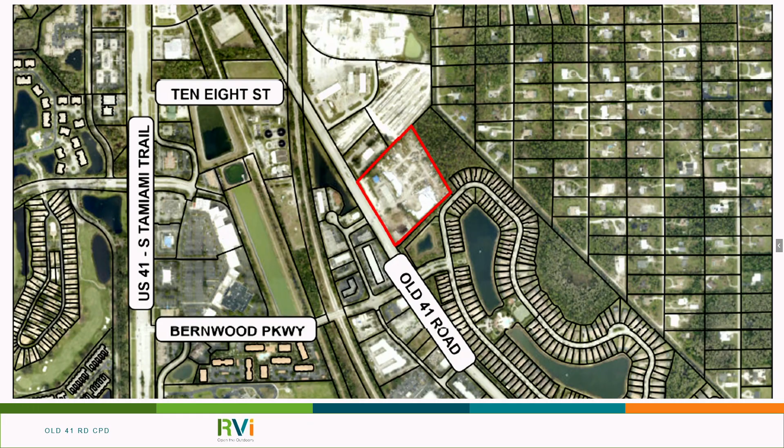With that overview, I'll turn this over to Mr. McBroom to walk you through his firm.

Hi, good morning. Connor McBroom with Forager Real Estate, Inc., as manager and sponsor of the applicant. We're an integrated commercial real estate development firm with offices here in Naples and also Toronto, Canada, where we are originally based. We've been invested in the Southwest Florida region for over 3 years now, and the proposed project would take our footprint in the vicinity to over 250,000 square feet.

We've owned the property for over a year now, and wanted to emphasize that we're fully invested in the market, committed, and fully intend on bringing this project through to fruition. We've assembled an expert team that you'll hear from today, by and large a local team. We've collaborated well with members of city planning and are excited for the opportunity to present this.

We feel that we've been extremely thoughtful about the way that we've programmed this site, responding to significant supply-demand imbalances that we see in the market, particularly for smaller format commercial space. We've also introduced a private mini warehouse component that responds to the need for secure, storm-rated vehicle and other valuable storage, but highly compatible, and will accommodate a lot of small businesses and medium-sized enterprises as well, where we see a dearth of good quality accommodation in the market.

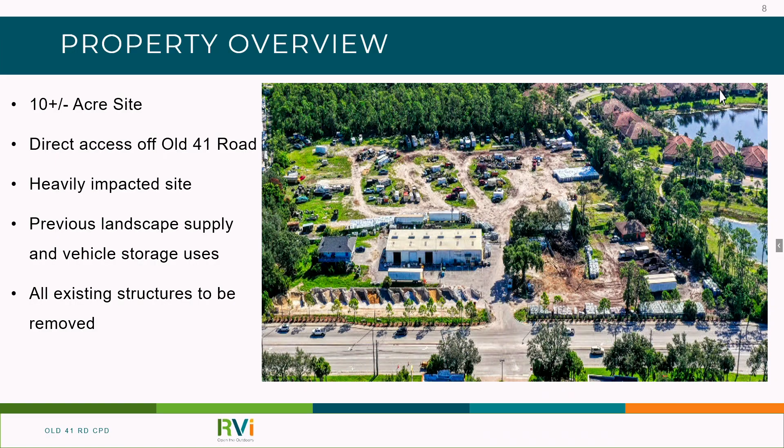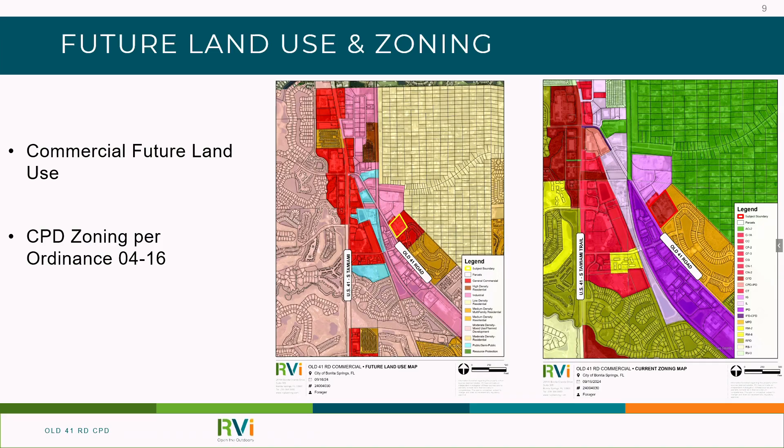Looking at the zoning and future land use designation for this site, it is commercial and will be remaining commercial. The existing zoning is a commercial plan development that we are changing the uses for, as Francesca spoke to earlier. Going over this site with its neighboring properties, directly to the north we have the Moose Lodge, and further north from that we have some heavy industrial uses, which is a concrete supply company. They do manufacturing of seawalls on site.

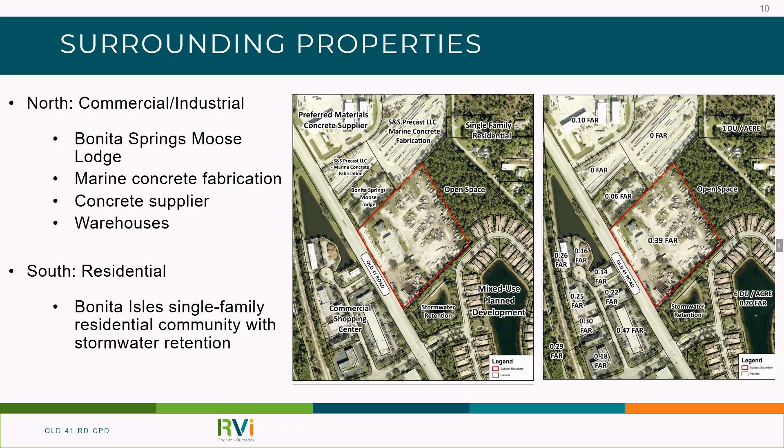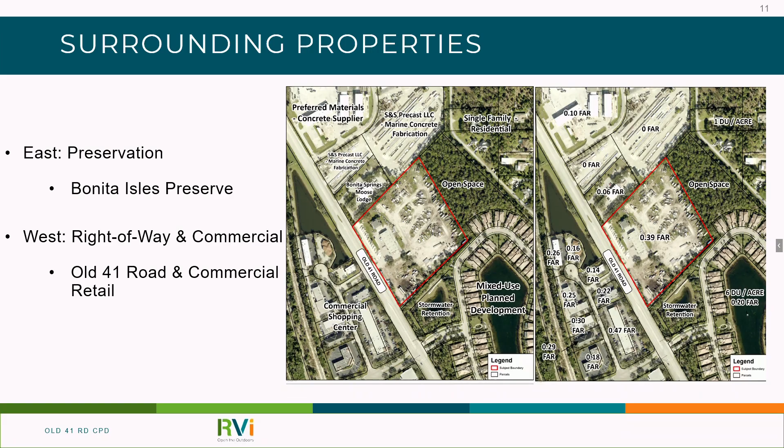Directly to the south, we have the Bonita Isles community as a whole, but directly abutting our property is their stormwater retention. To the east, we have the Bonita Isles Community Preserve land, and to the west we have the Old 41 right-of-way, and then commercial retail on the opposing side of Old 41.

We are proposing 6 separate buildings: 39,500 square feet of commercial retail, which will front directly on Old 41, with 4 buildings behind it that will total 150,000 square feet of flexible commercial uses, light industrial, and storage and mini warehouse in the back.

All of our buildings on site will be no more than 30 feet in height, and we are including an enhanced buffer along the south property line directly abutting the Bonita Isles residential community, which will be 25 feet in width, and we did include a 6-foot wall or fence at the request of Bonita Isles.

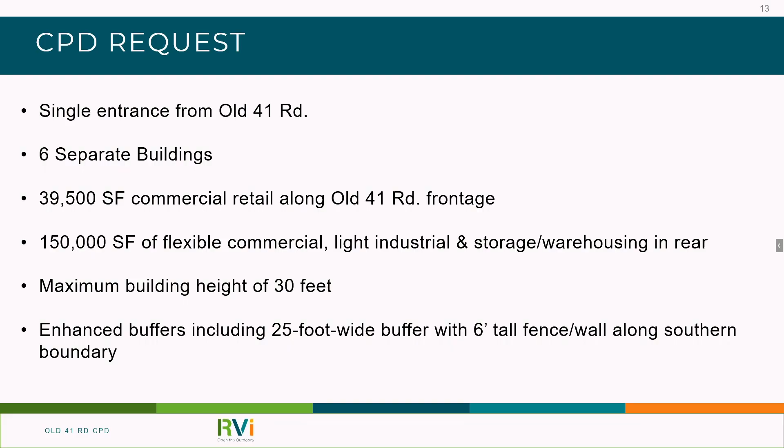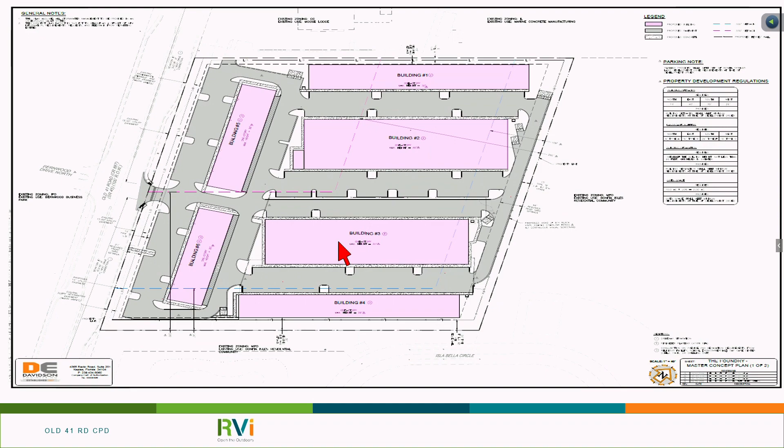Speaking to deviations, this request has 3 deviation requests. The first is access off of Old 41. As I mentioned, we will be maintaining that existing access. The code requires a separation of 660 feet from any neighboring entrance. The site currently does not have that, and since we are maintaining it, this deviation is required. The separation to the north is 459 feet, and from the south, the Bonita Isles entrance, it's 587 feet.

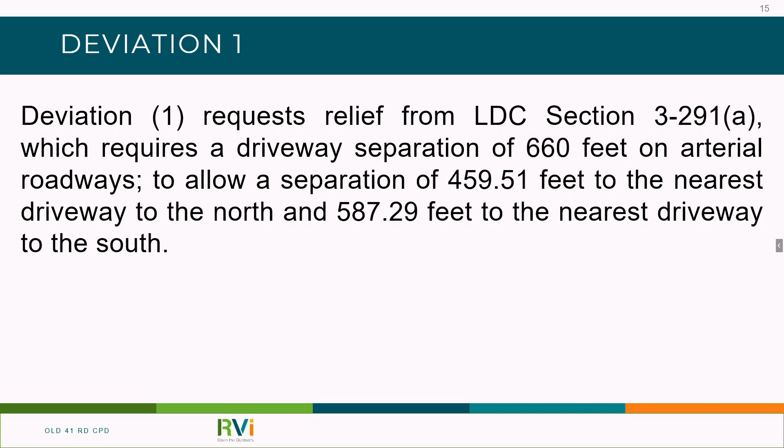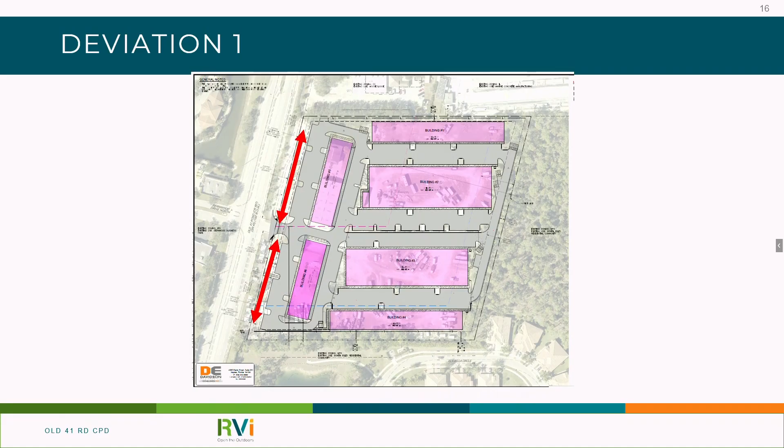As you'll see on your screen, here are the arrows showing those separations. The access to the north is for the Moose Lodge, and the access to the south is for the Bonita Isles community.

Deviation number 2 is a request to remove the requirement for perimeter plantings on all sides of the buildings. As you saw from our master concept plan, we are proposing to include landscaping on the end caps of each building because these buildings will be situated as storage facilities with garage doors that open up. We need that vehicle access, so landscaping could not be provided directly on all four sides of the building. We compiled that square footage and are putting it on the end caps to make nice landmarks for each of the building uses.

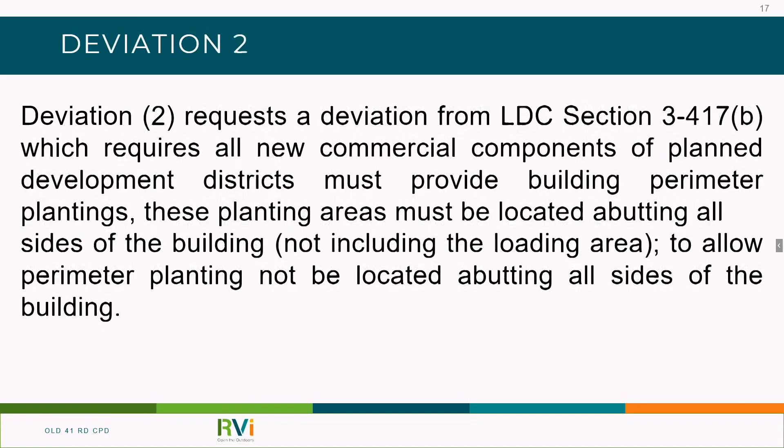Deviation number 3 is a request to remove the distance requirement for consumption on premises and off premises for the closest dwelling units. We do not have any schools, religious facilities, or daycares, but we did pull that from the code to be clear. Because of the separation with Bonita Isles, we abut their stormwater management and preserve, but there is one residence within that distance requirement, so we want to be sensitive to that with the request. These consumption on premises uses will only be in the first 2 buildings, those commercial buildings that front Old 41. I'm going to pass it over to Robert Derricks to go over our architecture.

Hi, my name is Robert Derricks. I'm an architect with JMDG. We're a Naples firm, but over the years we've done some work in Bonita. I was responsible for the Bonita Springs poker room as well as the sports complex next door. We're now involved in this. I want to speak to the architecture a little bit.

If I can back up the planning slide - there we go, that's fine. What we've done here is position the retail at the street side of Old 41. That provides us a kind of screening for more of the industrial applications behind it with the warehouses and the car storage. As you can see, that provides good screening with a central access point to the back area, which can be secured.

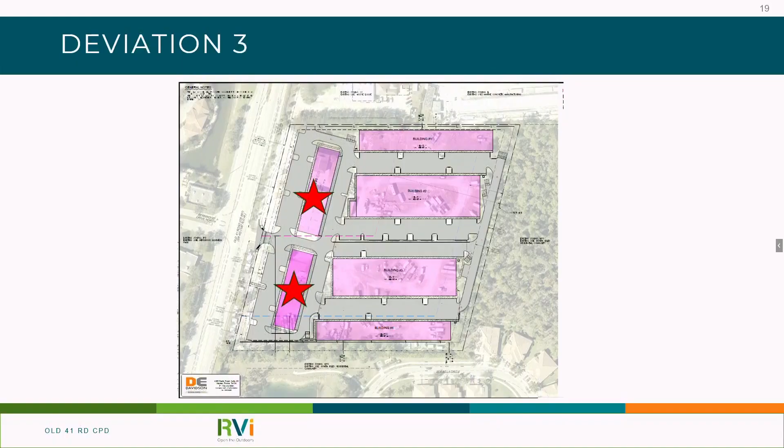And that pretty much speaks to the overall massing on what we did on the site plan. As far as the exterior elevations, it's a combination of canopy overhangs to provide rain coverage, as well as inset, and we alternate from unit to unit.

There's basically three elevational unit types that come across the commercial. Building 5 and Building 6 are almost mirror images of each other, except Building 5 is larger and has a little different center element to it.

And that applies to Building 2. It's the same elevation.

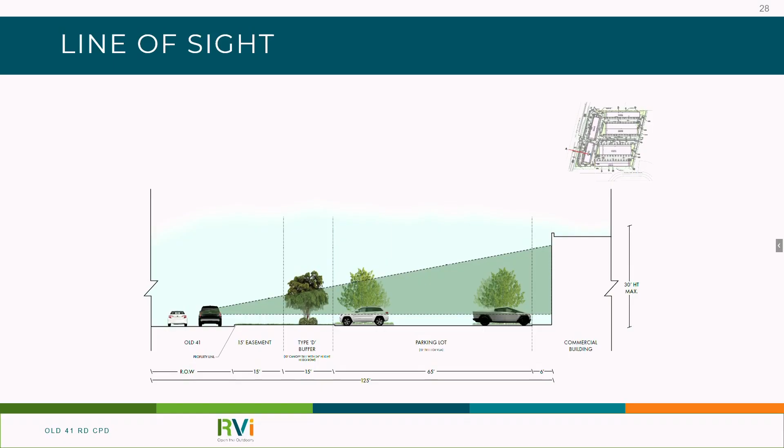And I'll pass it on to Christian.

I have a question, please. Question for the board, sorry. You've identified on the plan a forestry reserve. There's a forestry reserve sign along Old 41. What is that? Forestry Reserve is the existing landscape company that's on site right now. They are a landscape supply company. That sign will be removed, that's the name of their previous business. Okay, all right, thank you.

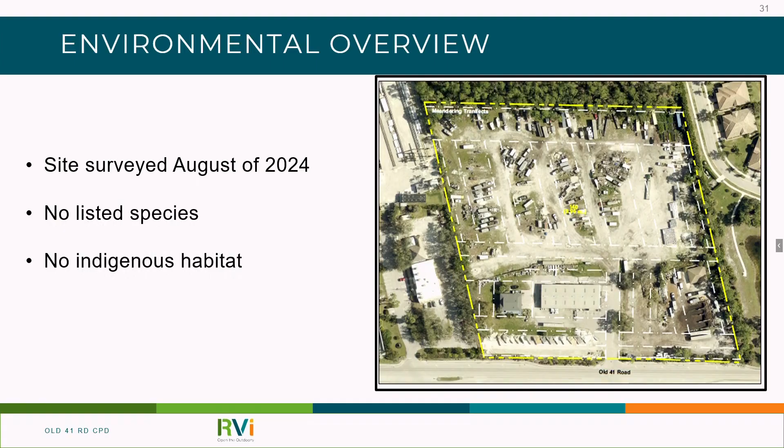The property was surveyed on August 13th, 2024 for the presence of listed species. During the survey, no listed species were observed on site. In addition, the survey did not find any indigenous habitat for listed species to use on site.

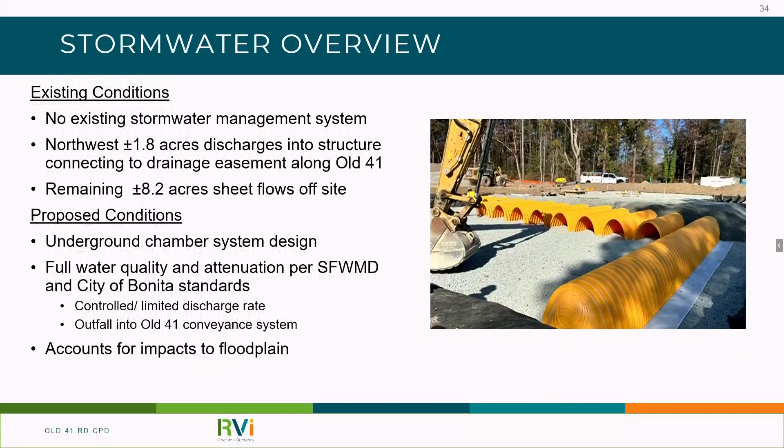Why aren't we doing this? Never mind, seems like a great idea. Money, that's why. Yeah, there's that. Thank you. Any other questions? Thank you.

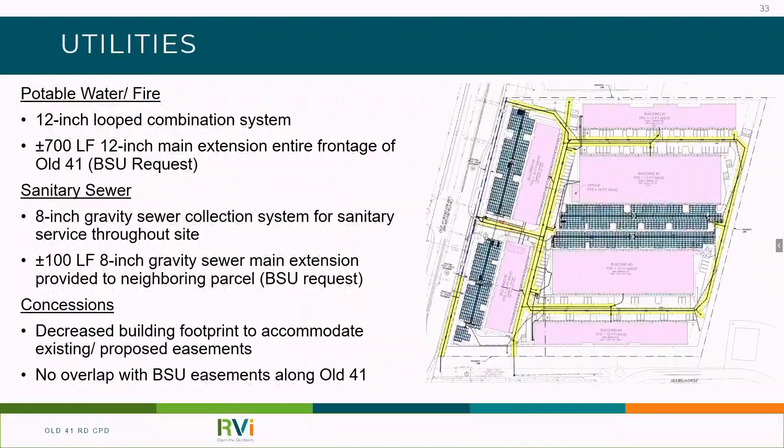Next, we're going to talk about transportation with our transportation engineer, Yuri.

Morning, for the record, Yuri Baiko with TR Transportation Consultants. I'm a licensed professional engineer in the state of Florida, and I've been sworn in and accepted as an expert in transportation planning before. We did prepare a traffic study for this rezoning application, which is requesting approval for up to 39,500 square feet of commercial retail uses, 80,000 square feet of storage mini warehouse uses, and 70,000 square feet of industrial uses.

We also prepared a trip generation comparison between our proposed rezoning request and what was previously approved as part of the previous CPD, which was approved for up to 126,600 square feet of commercial retail uses. So when you compare the two scenarios, our proposed rezoning request results in a significant reduction of traffic, specifically a 78% reduction in PM peak hour trips. We wanted to emphasize this because it's a significant reduction in traffic from what was previously approved as part of ordinance number 0416.

We also prepared our typical link level of service analysis on the surrounding roadway system. In this case, we analyzed Old 41 adjacent to their site, and the results indicate Old 41 to operate at acceptable level of service C, both with and without the project in the future traffic conditions. So again, there is sufficient capacity on Old 41 to support this rezoning request.

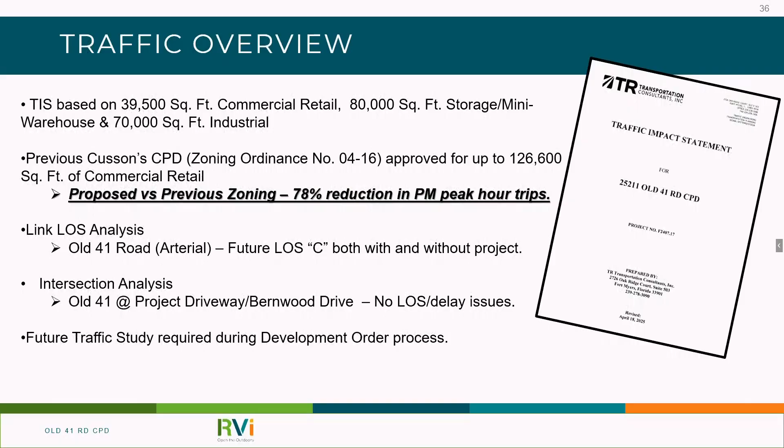We also conducted intersection analysis at our proposed driveway on Old 41, which lines up opposite of Bernwood Drive, and that analysis indicated no level of service issues or delay issues as well. That's all the analysis we were required to prepare at this time during this zoning stage. Should the rezoning be approved, the next step will be a development order process, at which time we will prepare another detailed traffic analysis. That's it for me, unless you have any questions. Thank you.

Bringing it back to our planning items. Before this petition was even submitted to the city, the developer voluntarily chose to reach out to the Bonita Isles Homeowners Association Board to introduce themselves and the proposed project. So no offense to the city, but they were the first ones to see the plan, back in July of 2024, actually prior to that.

And then from that, we did the required neighborhood information meetings. We hosted one in September of 2024, and at that meeting, we did have a strong presence from the neighbors.

Such a strong presence that the next day we chose to do a voluntary, fully Zoom meeting hosted after hours to accommodate any of the working class that was not able to attend the meeting the day before. After that, we did an in-person and Zoom meeting for the post-sufficiency. So there's been numerous opportunities for outreach from the community.

We've also kept in contact with the HOA board, invited them to have discussions, invited them onto the site. We've given them copies of the plans throughout every change that we've made. After our last post-sufficiency NIM, about 6 people requested a copy of the PowerPoint, which I provided. I gave everybody the same PowerPoint that was shown throughout that neighborhood information meeting, and it was then circulated through their Facebook group to ensure all residents were informed of what was happening on that neighboring site.

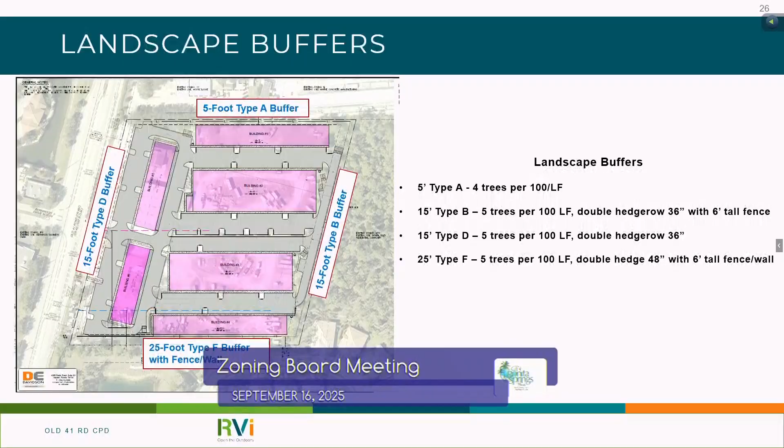We also want to be respectful that the users in the site would like some landscaping, to utilize the site they're paying money for. So at the end caps there will be elements such as benches and shaded trees, providing a nice outdoor experience. Even if it's not visible, we want the project to holistically look nice, meet landscaping requirements, and still be a nice element for all residents, including those on our own property. Fantastic answer.

I see little hatched out gray areas in the landscape buffers. Is that where dumpsters are gonna go? Yes, so all of the dumpsters - you guys got fancy new technology, so I want to use it.

Our dumpsters are shown at the end caps. We spoke with the utilities department to ensure there was access for the vehicles, so all of the dumpster locations are directly abutting one of the access points for the site. All of them will also be screened from view, both for internal users and for residents outside of the community. I believe we have 1, 2, 3, 4, 5 - I think it's 6 dumpsters in total.

Uses outside the community? Sorry, residents outside the community - nobody's using our dumpsters outside. Say that sentence again, residents, who's using them? Only our internal users will use our dumpsters, but they are screened from view from anybody outside of the site. Okay, I missed the screened from view part. That's great, thank you very much.

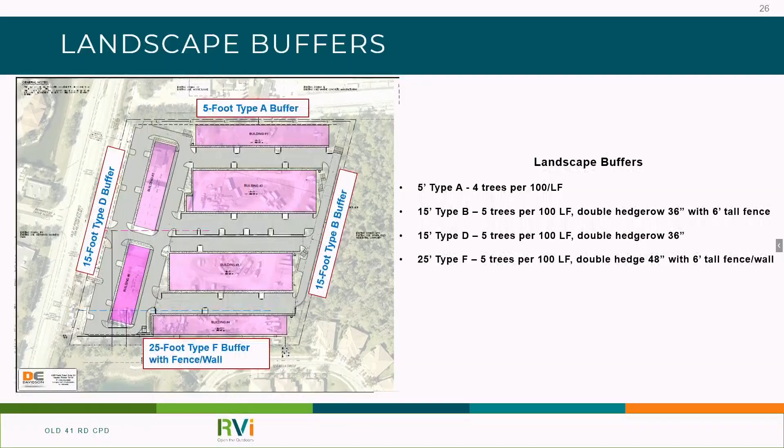Absolutely, with that I'll pass it over to staff. I think we take public comment now, don't we? No, we'll ask Mary to come back to the lectern, and then you can ask questions of staff. I do know where...

Good morning again, Mary Tornberg. I can go through my presentation or I can just touch on the key points I'd like to mention. It's your pleasure, I vote key points. Okay, especially where you didn't have a decision. Yes, I'll get right there.

So deviation 3, I did not recommend approval or denial. I felt there needed to be more analysis done by the applicant as far as how the deviation criteria was addressed. This particularly applies to the package store, which is proposed conceptually within 500 feet of residential. So if you'd like to allow the applicant to come back and address that for you, you're welcome to. Again, I just needed additional analysis there. So a package store within 500 feet of residential property requires that deviation.

But what would additional analysis tell you to help with the decision? Well, you have your deviation criteria, and number 2 there preserves and promotes the general intent to protect the public health, safety, and welfare. I felt they needed to touch on that a bit more to make a decision. Again, if you'd like to hear that, they can do so. Hear it from who? The applicant. I'm okay, yeah. Are there other high points you want to bring up?